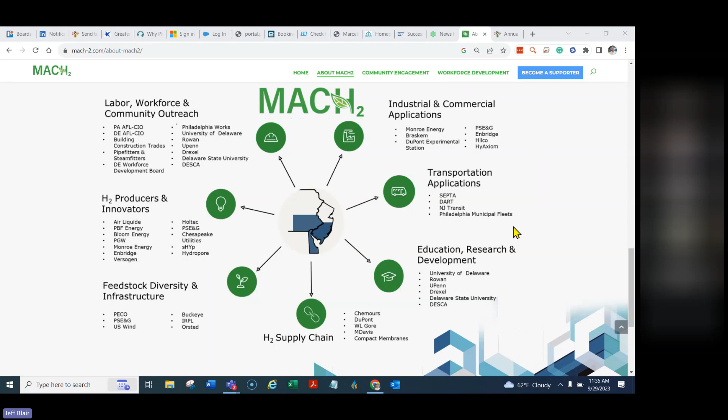We're talking today about this proposal. There's no guarantees on this yet for the Mach 2 hydrogen hub. This was put together by some local politicians, some local marketing or public relation firms, and these are good proposals coming in all over the country. Cory will talk a little bit about that later. The Department of Energy is putting major dollars out there to fund potentially quite a few hydrogen hubs around the United States. The Philadelphia area calls it the Mid-Atlantic, and MACH stands for Mid-Atlantic Clean Hydrogen Hub. So just on the record, ISA Philadelphia has no affiliation with this, it's just something that's out there in the public domain. Obviously, being in the Philadelphia area, we would welcome this and hope that something like this would land, but proposals like this are all over the country.

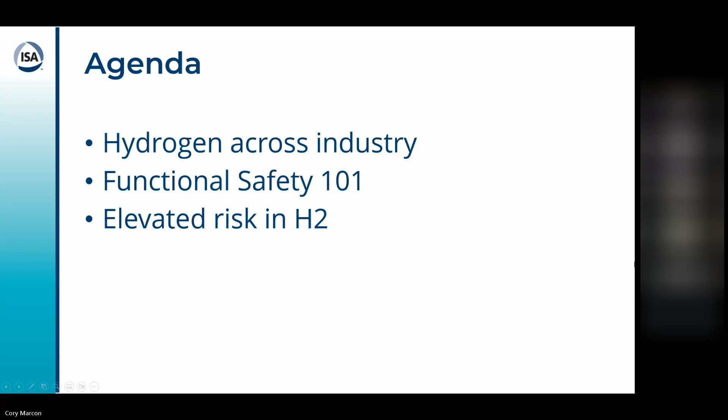So it's kind of been hailed as this Swiss Army knife of decarbonization. Certainly hydrogen is not new. Refineries and chemical industries use it to the tune of about 10 million tons a year in the US, about 90 to 95 million tons a year in the world.

And 95% of that production is gray hydrogen, from coal gasification, or even more popular, steam methane reforming. So that's natural gas or hydrocarbon feedstocks to then produce hydrogen for an end user that's often very close by, right? You have your SMR plant at your chemical plant, or your SMR plant at your refinery.

And it's used as a catalyst. It's used in ethylene crackers, all these various applications, and that's hydrogen that, when it's produced using a fossil fuel, you're venting carbon monoxide, carbon dioxide into the atmosphere. So right off the bat, there's the decarbonization of those sectors.

I don't know how much you guys know of the colors of hydrogen, but if you throw carbon capture on a fossil-based feedstock, it's blue hydrogen, right? If you're talking about electrolysis, even grid-tied electrolysis, which sometimes the grid's running on coal, especially at night, then you typically will call that green hydrogen.

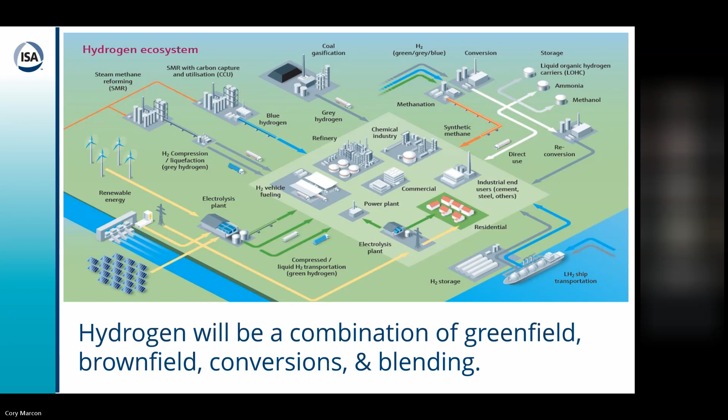So to take a step back, safety, instrumentation, automation - fundamental to the safe operation of a plant.

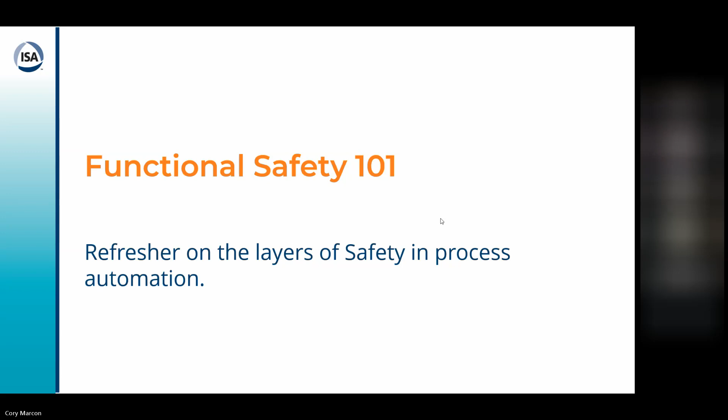For us, we participate in different initiatives. The Center for Hydrogen Safety is a group run by the American Institute of Chemical Engineers. Fantastic group, I can't highly recommend this enough. They will go through actual incidents, real life - like an O2, H2 failure caused a tank to rupture - and they'll do root cause analysis. They reach out to the operator of whatever the asset was that failed. They collect all this information. They present it back to a group of functional safety engineers that just ask questions, with the goal of safety by community, right? At that point, it's not a bunch of hydrogen companies trying to compete with each other. It's a bunch of engineers working on hydrogen that have the common interest of safety across every hydrogen application, right?

To avoid that kind of Hindenburg effect of a former time, right? We want to make sure that we don't have a major safety issue, or God forbid we do, it's well understood. I love to give the example of the Plug Power image of the flaring that was happening at a gas station that was caught on somebody's cell phone, and people freaking out and putting it on the internet.

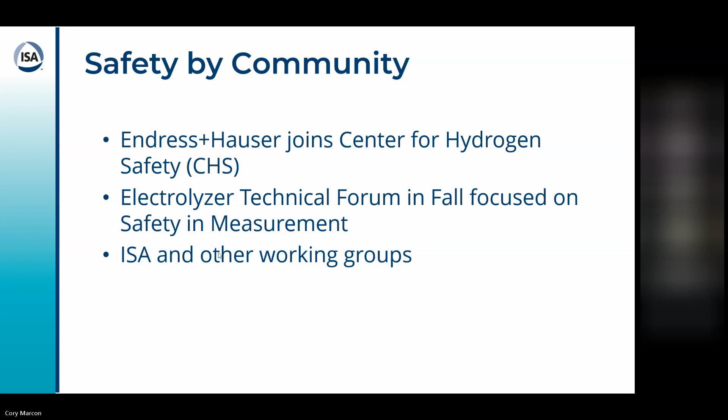We're also committed to doing some smaller, intimate technical forums to make sure we get more voice of customer into our innovation process, and our participation in ISA or other working groups. Open to having this conversation with other ISA groups, but also your feedback on what you guys are doing to stay in the know of all things hydrogen.

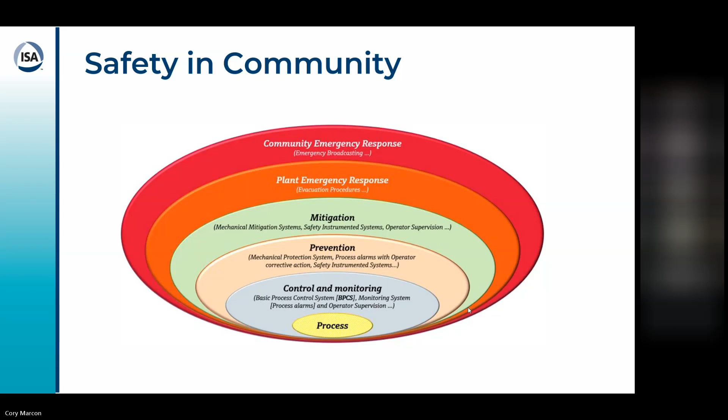So safety in the community, those are the different layers. Thinking about emergency response, how is it communicated to the broader community? Down to mitigation, prevention, controls and monitoring process. In mitigation, we start to get into that world of SIS, and then really the heart of it for instrumentation automation is in that BPCS, down and very close to the process.

As far as a safety instrumented system versus basic process control system, these can be separate. They seem to have converged over the years with certain DCS vendors. We are totally agnostic in terms of what that network looks like.

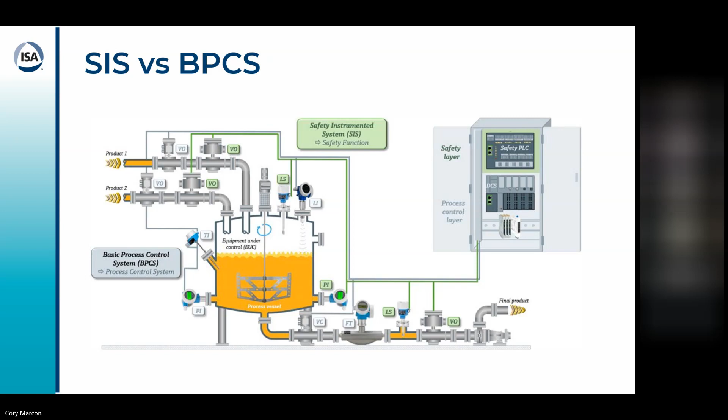I will give the anecdotal story of an electrolyzer company that ran into some cybersecurity concerns around not really separating the SIS from the BPCS physically. Separate panels, dedicated IO to what is a fault that will trip and cause a major shutdown, to prevent a catastrophic failure, versus what you're monitoring, versus what you may be using to ramp up and down the operation of the plant itself.

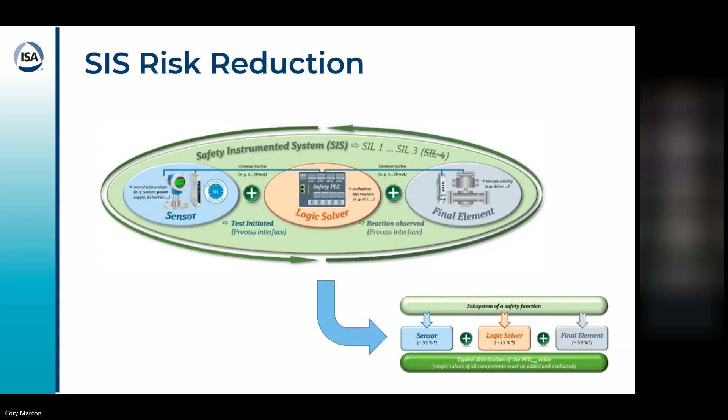So when you're evaluating instrumentation vendors and considering reliability, there's two types. There's the inherent reliability, so that's working with suppliers that follow best in class quality standards, things like ISO 9001, or even calibration standards like ISO 17025, and then the SIL level of the device itself, which has a lot of rigor around electronic failure. I will dial a little further into that message in terms of the limitations of what SIL really is relative to application risk in subsequent slides.

And then there's proven reliability. Consider this the ongoing plan to ensure reliability in that leading vote, that instrument that's telling you what to do in the case of an issue. There are ways to do onboard verifications and partial and full proof testing in these instruments, not just ours. That's the trend we're seeing across instrumentation manufacturers, and I think it's wise for folks to consider that because it can make safety easier over time. It can make it much more simple for your operators to prove out safety over time.

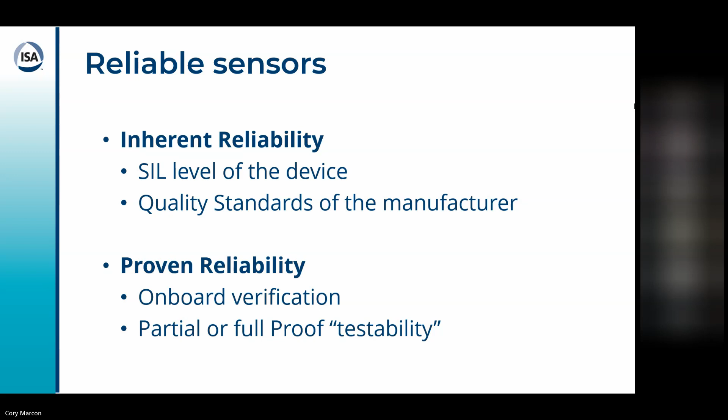Hey Corey, this is Jeff. If I may ask, in your general opinion, or maybe you've heard this question before, is a SIL rated instrument, SIL 2, SIL 3, whatever, generally regarded as better than a non-SIL rated instrument in terms of quality and performance and reliability?

Yeah, so SIL is somewhat of a paperwork exercise. For us, it's a very nominal cost adder. So, in my opinion, I would just throw SIL on everything, if it's in a safety system or not, and then you just have that paperwork available. It's like $20 maybe on some instruments, some we don't even charge. But it is an important exercise.

So once a vendor has gone through the work of getting a product SIL certified, effectively what they've done is dissected every single component inside of that electrical assembly that we call a pressure transmitter or flow meter. There's a lot more than just the Wheatstone bridge or the Coriolis tube. There's all the sensors that interact in order to have that physical principle relate all the way to a 4 to 20 output or some other Profinet or whatever comes out to go back to the system.

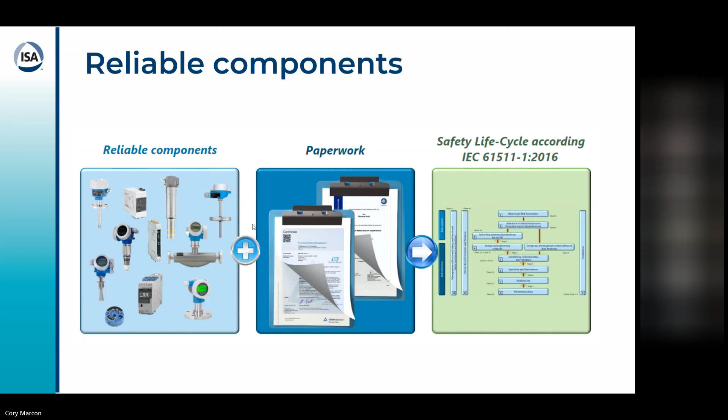Appreciate it, Corey. Thank you. Yeah, no problem.

So this is just kind of showing the life cycle. We start to get involved in the design and engineering as you start to consider certain SIL instruments.

As Jeff alluded to, at some point when you're speccing out safety loops, you do have to consider SIL. Sometimes you don't—sometimes you can get around it with other things like redundancy. There are a lot of specialty transducers out there that you may not have SIL on ever, so you just add 3 instead of 1, those types of calculations.

Because overall what matters is the safety loop becomes a bit of math homework for your engineers. The SIL instruments make that math homework easier, because it's like we've solved our own math problem and we're giving you our information to feed into the overall math problem. But certainly you can achieve an SIS, like a SIL loop, without SIL rated instruments.

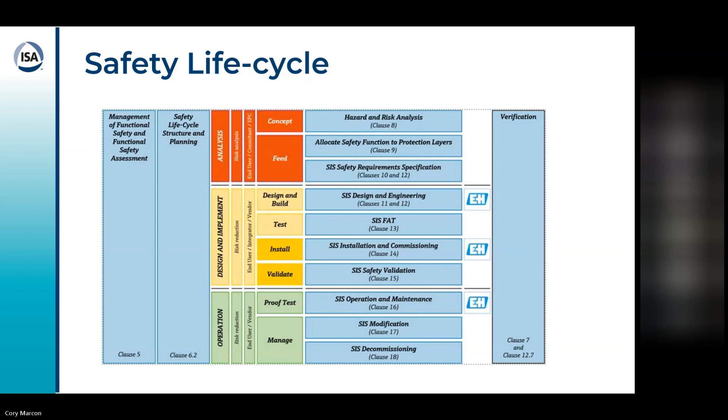And then the installation, commissioning, ongoing operation and maintenance—that is kind of what I was discussing with respect to how do you operationalize safety over time, how do you proof test something.

So there's really 2 types of failures as it relates to SIL. Again, I want to draw that very clear circle—this is the world of electronics that we're talking about. We're not talking about an instrument in hydrogen yet. We're talking about an instrument as it exists that would potentially fail just because of the electronics.

So there's the burn-in and wear out, where you just have a higher risk because if there is a fault in the factory and it does get out, you would typically see that soon. And then at the end, that's how you kind of determine the overall expectancy—the chances increase that something's going to fail at the end of its life. And then in the middle is just where it's a random failure rate.

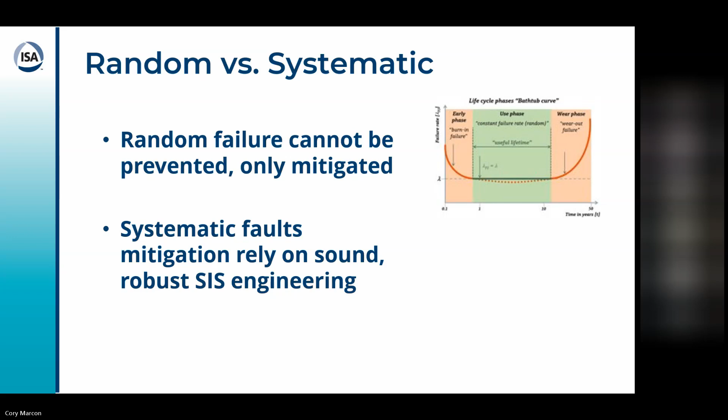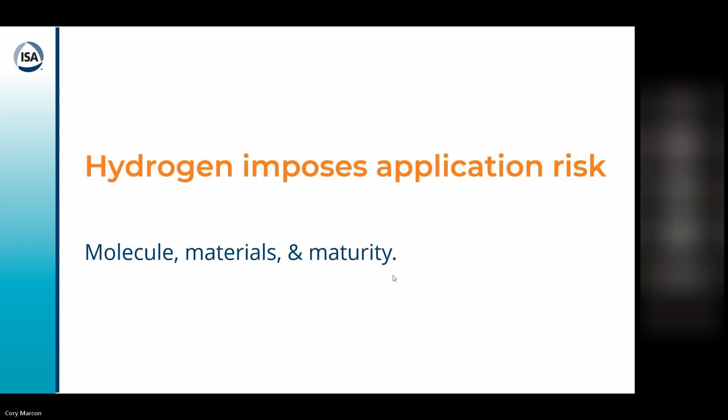So now what I'm going to move into is the application risk. If I was talking about SIS and electronics, now I'm talking about maybe some mechanical risks associated with, in this case, the hydrogen itself. I'll go through quickly 3 applications here.

So you guys probably know the basic periodic table—hydrogen's small, and because it's so small, it's leaky. We have a lot of infrastructure set up for natural gas and even methane leaks. I think I saw somebody from Sensidyne on the call, and a good thing to mention is that hydrogen, because it's diatomic, can't really be seen with infrared. So a lot of the newer higher end gas detection actually can't see hydrogen.

So flame detection, fine—you can see the hydrogen flame with a UV IR type of sensor. But with gas detection, the top of the line stuff that's out there snooping methane facilities, you hear about the drones flying overhead and seeing big plumes of methane—that's not possible with hydrogen. First of all, because of the measurement principle in those drones using mostly infrared, and second of all, because hydrogen dissipates so quickly, you don't see that same kind of pluming effect.

It's hard to compress. So the thermal conductivity is really the coefficient there that ends up driving the difficulty to compress. I'm not a thermodynamics guy, but maybe some of you are—the reverse Joule-Thomson effect is very strange.

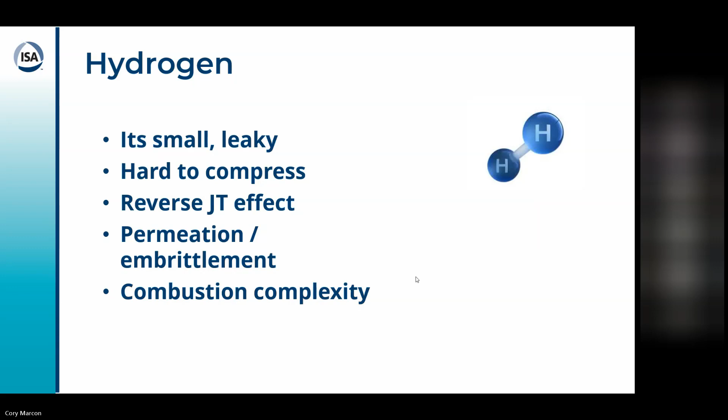And then the combustion complexity—I'll discuss this a little bit when we talk about hydrogen blending.

Did ChatGPT write your presentation, Corey?

No, it didn't. Okay, you had me worried there for a minute. All right, as long as you reference it, I think we're okay. Yeah, it hallucinates a little too much to rely on.

But yeah, so I'll just quickly go through three applications that we see emerging, or at least changing, in this new hydrogen renaissance.

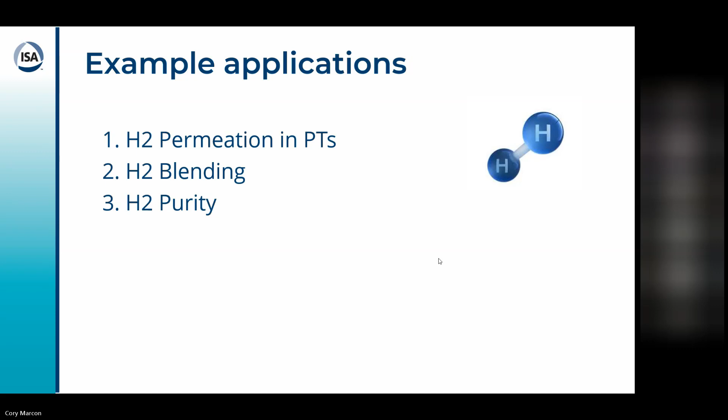First is the permeation through pressure transmitter membranes. This is a pretty well-known, well-understood phenomenon. We're talking about already having 100 million tons of hydrogen in the world in production today at various facilities, and these facilities do use gold-plated pressure transmitters because it's very well understood that high pressure, high temperature - meaning really anything over 100 psi, anything over 100 F - that's kind of the real easy rule of thumb. You want to start looking into a gold-plated membrane.

And we have a pretty good manufacturer declaration that talks about this, in terms of partial pressure, which matters when you're considering blends of hydrogen. So if you had a plant, like a natural gas facility or natural gas end user, that was blending in hydrogen, you can use the partial pressure rule to determine whether a 30% blend at this pressure, this temperature - you'd calculate that to a partial pressure of hydrogen - does that warrant this kind of additional cost for this additional safety?

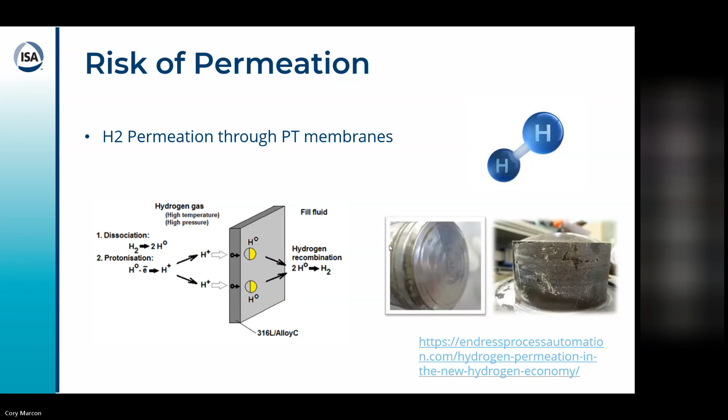So for us, we released a new pressure transmitter product line this past year, and in doing so, reading the tea leaves on hydrogen, we decided to do some additional testing to determine what our standard gold-plated membrane should be that we apply. We get it electroplated onto our diaphragms, and you can probably intellectually understand the phenomena and the trade-offs there, or the conundrum, I should say.

The more gold you put, the thicker the membrane, the less sensitive it is to the change in pressure. Now, granted, gold is soft, so it's not a huge impact. And then there's also ways you can do the manufacturing process, like do a compensation on temperature and pressure after you've electroplated the membrane, which can really significantly minimize any sort of risk to the performance based on a thicker membrane.

But we looked at 5, 10, and 25 micron, and at 5 and 10 we saw some pitting, meaning, well, what's the point? If you're spending some extra money and an extra step in your manufacturing process to add a layer of gold, why add a layer when you may end up actually having pitting, and therefore a false sense of security?

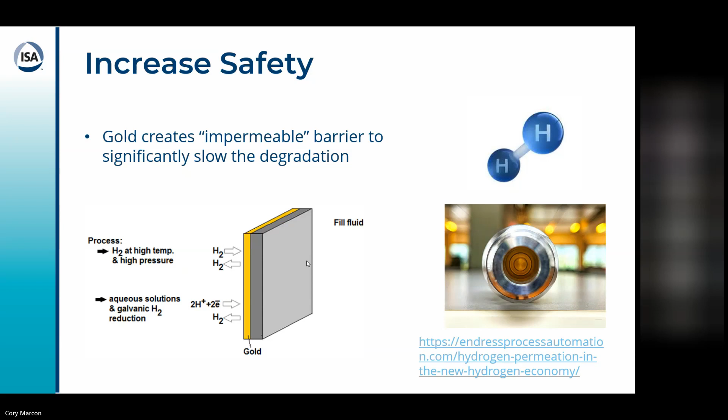So this is a big issue. And as I mentioned, the SMRs, the steam methane reformers, are a pretty consistent application. Now we've got a bunch of different hydrogen applications at different pressures, different temperatures, and that increase in pressure, that increase in temperature, does increase the permeation rate of these membranes. Gold significantly slows it, but it's mostly, let's say, impermeable to the hydrogen, so you'll get a lot more longevity out of your pressure transmitters, and you won't get that short-term drift on an annual basis.

So I did touch on this - it's partial pressure, temperature, and exposure time. So if you were, let's say, doing the Long Ridge Energy project, which I'll allude to in a later slide, they were blending hydrogen for a demonstration, and that's temporary. We weren't telling them every single pressure transmitter in your gas fuel system needs to go gold, because that's just not realistic given what the application is.

So this isn't to press a panic button or to scare you guys. This is just to let you know that the tools exist for a more robust system. But honestly, it's dependent on the application, which is evolving based on large-scale demonstrations - being temporary versus full-scale new applications with higher pressures, higher temperatures, for example.

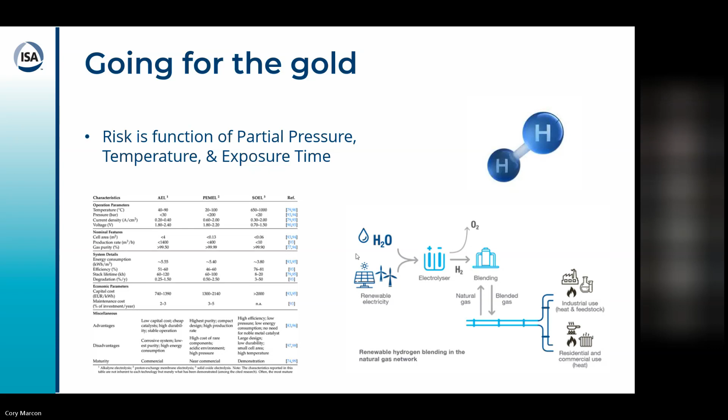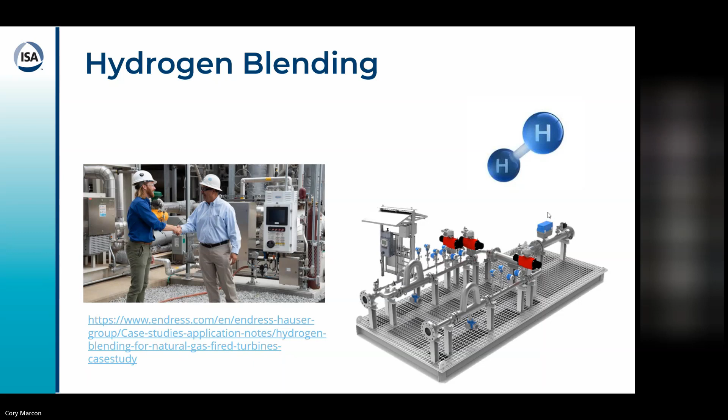So if I just double tap on fuel systems, where personally we've had the most experience, and where I do think the risk is a different profile than pipelines. Fuel systems, think of them as like a short amount of pipe that's going to an end use - a boiler, engine, turbine - and there's different issues around what that means for operators.

Of course, there's practical things like hydrogen may have, by mass, a higher heating value, but by volume it's about a third of methane. It's more flammable. It also has a higher flame speed, which can cause some issues in the actual combustion process.

So we see dry low NOx gas turbines actually publish limitations that would effectively trip the whole turbine, because you would melt the fuel nozzle, the hottest part of the flame, which has been so engineered for methane. That new geometry of the flame, by introducing 30, 40, 50% hydrogen, would actually move the hottest point of that flame to the fuel nozzle itself, causing it to melt. You got to trip your turbine, you're down. That's hundreds of thousands of dollars a day, and fuel nozzles aren't cheap.

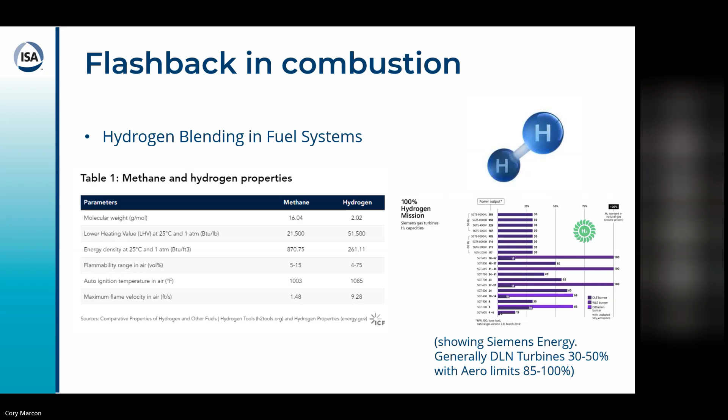Pipelines, a little bit more about materials. It's less of an issue in terms of time, because their end user could be miles away. So any sort of blending is probably more about knowing that your hydrogen is sufficiently blended, more than it is about knowing the percent hydrogen because of an operational issue that you have to deal with in real time as a turbine operator, for example.

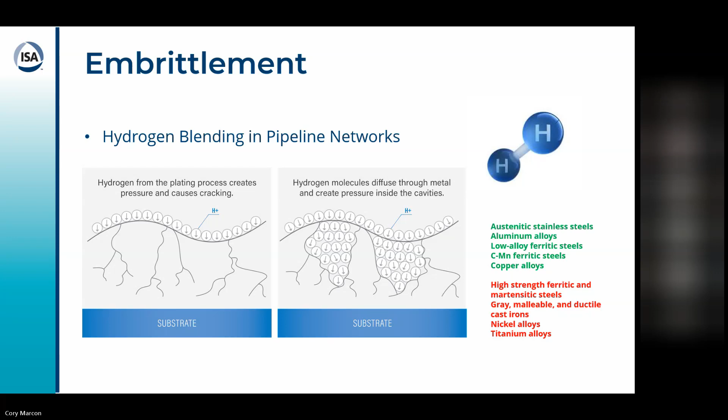So in a scenario where you need a fast compositional measurement to prevent that overshoot, going from 25% to 35% can actually mean the difference between melting a nozzle and not melting a nozzle. And flow meters, the other control valves that are in the system, they can fail, or they can have an issue, or make a bad reading.

And so we've seen this emerging need for some sort of validation. It can be done with a chromatograph, it can be done with a chromatograph with a thermal conductivity detector. There are other ways to measure it, but Raman spectroscopy offers this faster response - we're talking about 30 seconds. Plus, it can just be put directly into the pipe, and it's an optical measurement, so you don't need to flare an altered sample. You can just take the sample at process pressure, return it to the pipe in which it came. So really emission free, allowing for that continuous measurement.

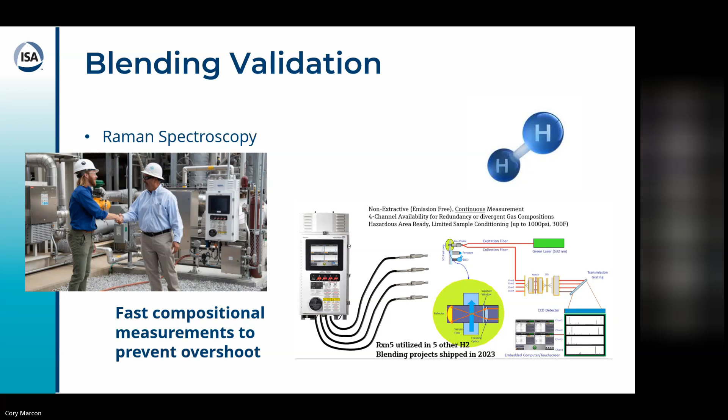And that's the technology that we provided along with our flow meters for the Long Ridge Energy Project, last Earth Day, that was able to demonstrate the hydrogen blend on the large combined cycle power plant.

So moving on to finish up here, I'll go a little faster, I want to leave some room for conversation. Purity is another emerging application.

I venture to say this is fundamentally misunderstood, because I see specs that say hydrogen analyzer, and they're completely made up. They say we need a hydrogen analyzer to make sure something is 99.999% pure, and it's like, you're never going to get that.

There's no technology on the market that directly measures hydrogen and calculates, yep, it's this pure. Really, that's what this blurb from the DOE says—it's about determining the maximum level of contaminants. It's about looking at the contaminants and back calculating the purity. The reason I bring this up in a safety presentation is because there can be downsides to impure hydrogen.

Impure hydrogen making it out into, for example, the mobility market—you can have significant corrosion on a fuel cell to the point of complete failure.

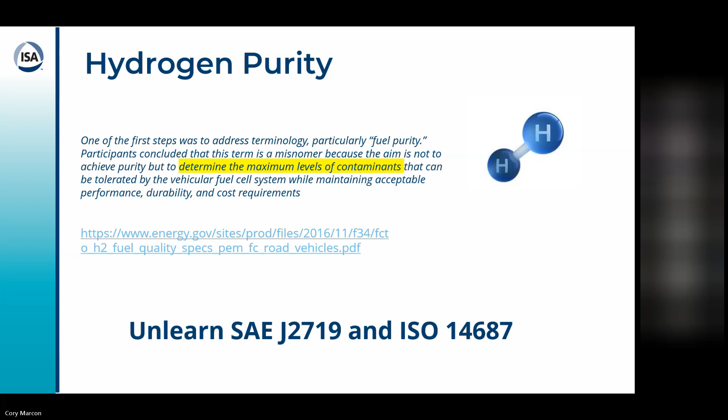This has historically been written around every single possible location the hydrogen could come from, whether it was an electrolyzer, or coming from coal gasification, or maybe a byproduct of a chloralkali plant for chlorine production, and of course the SMR pathways.

And if you had to measure all of these different contaminants at the end use, you're starting to get to a place where it's just economically unfeasible to do so.

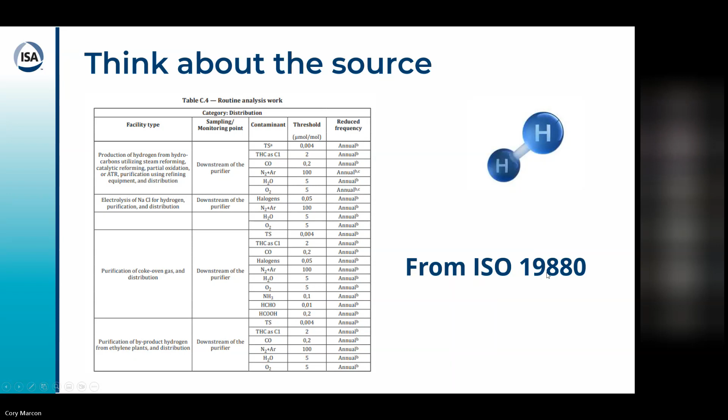And so ISO 19880, especially table C.4—this is virtually what you see, and this is what I want to show you.

If you just think about impurities based on the feedstock and the plant operation by the hydrogen production technique, that's when you start to get towards a more cost-effective way to ensure downstream safety. Once you're putting hydrogen into the open market, measuring purity at the source is a much easier challenge to solve than a catch-all analyzer that doesn't exist at the point of end use.

And that's really the point I want to make. For example, with electrolyzers, your feedstock is water, and your purge gas is typically just nitrogen.

So as far as your process goes, your only two contaminants are oxygen that went the wrong way—when you split H2O into H2 and O2, O2 goes left and hydrogen goes right—that cross-membrane permeation, or moisture in a vapor state that evaded all the various steps of separation and drying for purification downstream of an electrolyzer. Those are your two primary process-related risks.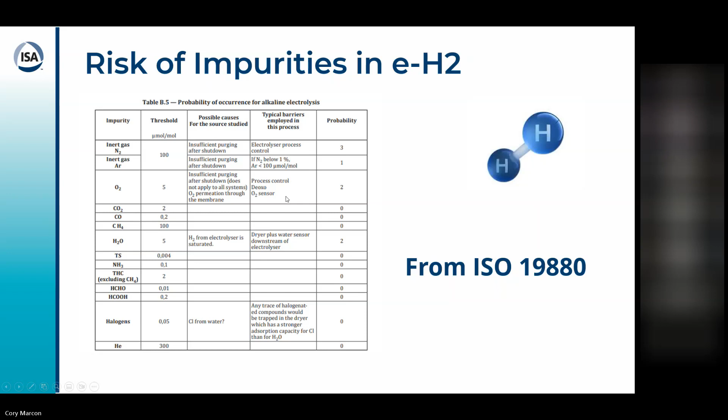Effectively, if you're able to monitor the trace H2O and O2, you can get that online hydrogen purity, because as soon as you move from producing to vent to actually closing the vent and producing to compress or store downstream, your only two risks are moisture and oxygen. So that's a much easier challenge to have analyzers for.

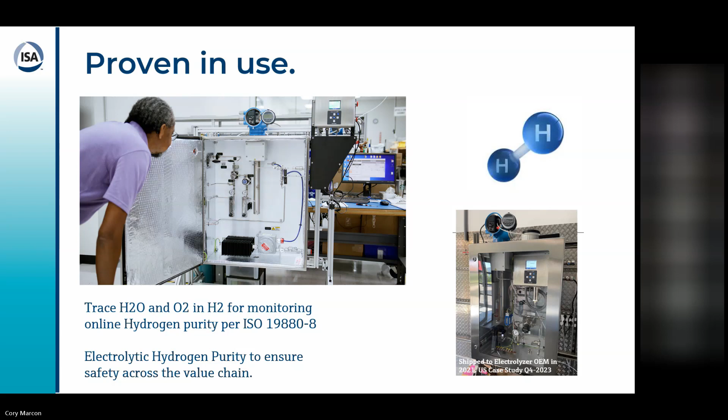You can see some that we've provided for electrolyzer companies that are measuring trace moisture and trace oxygen.

So that was really it, I just wanted to touch on those topics. I think hydrogen purity is evolving, and really has to do with safety across the value chain, making sure downstream consumers of hydrogen that's produced are ensuring safe operation.

Hydrogen blending is a phenomena that is growing in interest and also understanding. There are a lot of challenges there around stratification of the blend over long stretches of pipe, so you can have big bursts of hydrogen. When it comes back to an end user, unless you're remixing hydrogen, there are various technologies to ensure that you've correctly blended that hydrogen so you don't have those issues.

And then, of course, the permeation of the pressure transmitters is something we've always understood, but now has a little bit more to contend with in terms of the types of applications you'd see in a world where hydrogen's not just produced by steam methane reforming.